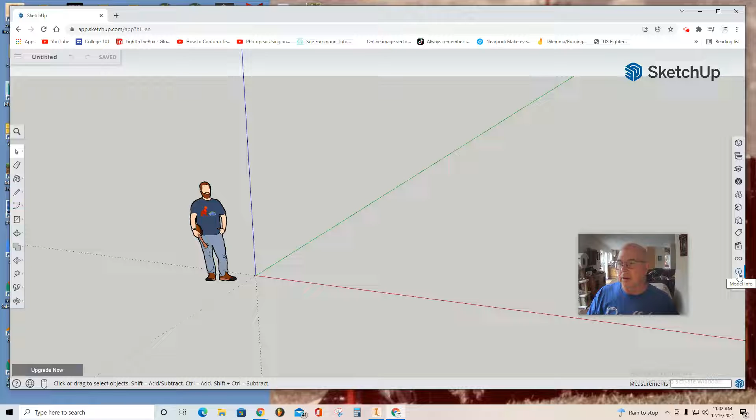Create new, and move down to the right where you see this model info tab on the lower right. Select that and change your units format to decimal. I've been changing the snap interval to 0.0001. Hit the enter key to lock it in.

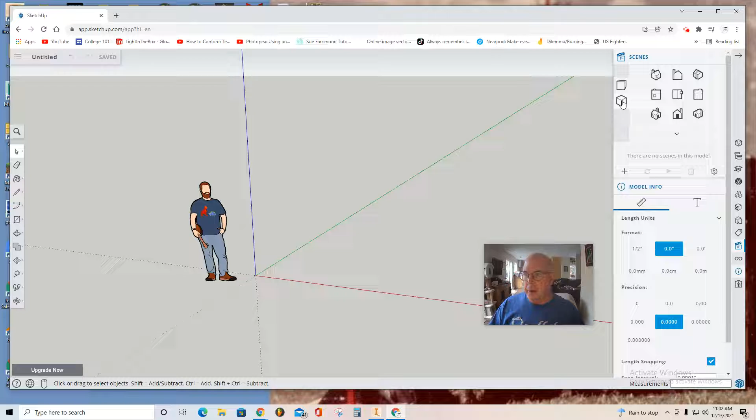And then move up two tools to the Scenes tab, which looks like a movie clipboard. Select it, put it in parallel projection and front view. I just like to select the 6'3" sir and delete him. Now I move my origin with the pan tool. See down the left, there's the lower left pan tool. Select it, move your origin down to the left, and then start with a very large rectangle at the origin.

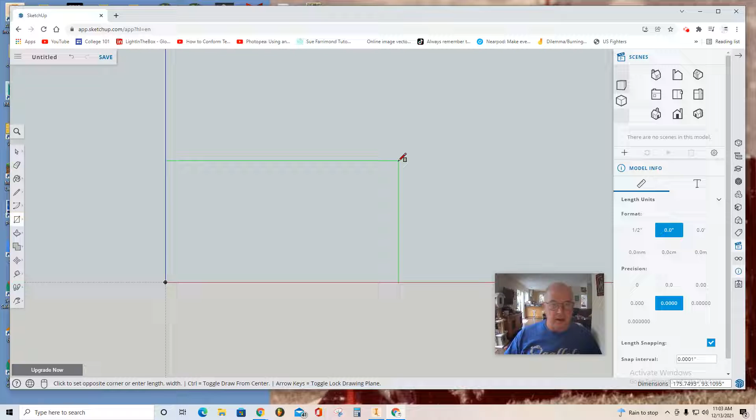Select the origin, move it up and to the right, and then take your hands off the mouse and type in 200, 216. That's a 200 by 216 inch movie set. Now, what I'm going to do is orbit using this orbit tool, and I'm going to use the push tool to push the front of my box back 200 inches. So I type distance down the bottom right. You see 200. I typed it in and then hit enter.

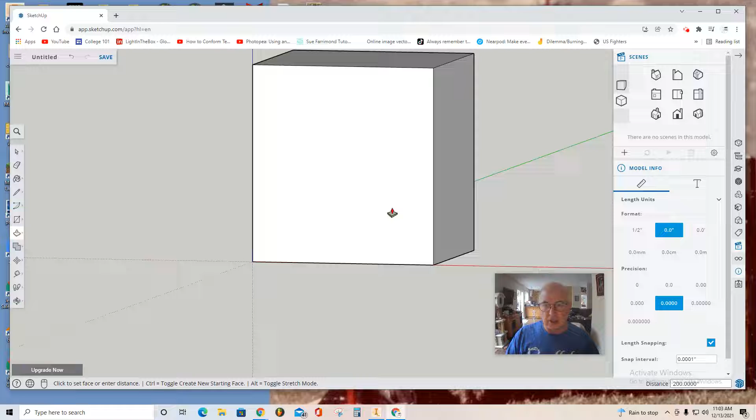Now I'm going to select the face again and push it back, and then take my hands off the mouse, and under distance in the bottom right, you're going to type 194, enter, and now you have a 6-inch wall. Again, put it in the front view and make sure it's panned and centered in the middle. Now I'm going to use what's called the offset tool. It's under the push-pull tool. It's the third tool down.

So I select the offset tool, select in the middle of my profile here, and then stretch. And down the bottom right, you see distance, approximately 8. So I want to hit 6, enter, and immediately use the line tool at the top and upper left. So I select here at the end point corner of this offset and push a line up to the top.

Escape button. Sorry. Now I'm going to use the line tool down the bottom right, where I select the endpoint here and move it across. And then again, hit escape on your keypad. Now you see I can use the eraser tool to erase this line and this line segment, leaving me with an L that is 6 inches offset.

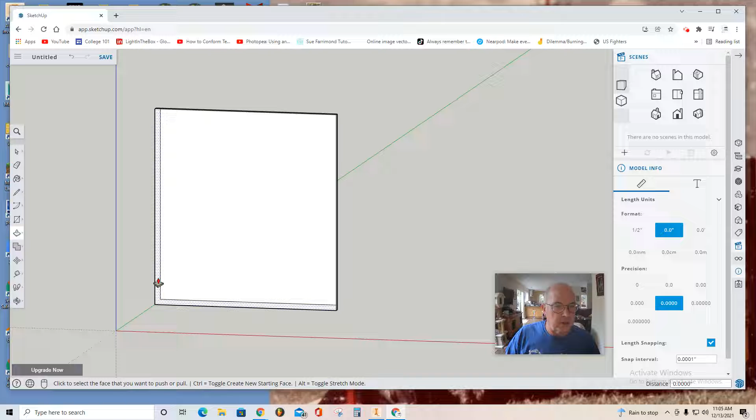Now I'm going to orbit a bit and use the push-pull tool. Make sure you only pull this L shape and then pull it out. And as you're pulling, you want to type 194. Enter. And that will give you, so far, a 200 by 216 by 200 set of walls and floor. The walls and the floors all should be 6 inches in thickness.

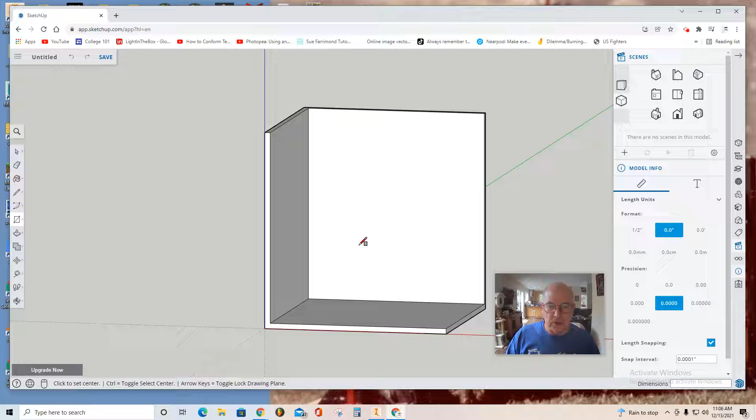Orbit this to draw. So start here at the edge where the floor and the back wall meet. Select that edge, drag your, oops, again, make sure you're in the right tool. Drag your door up. Type 32, 80. That's a standard good door. Hit enter, and there's your door. And then use the push-pull tool to pull it out 1 inch. So your dimension will be 32 by 80 by 1.

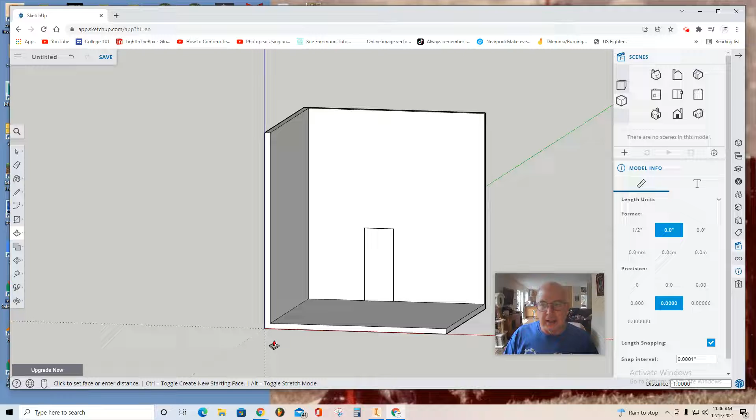Now I'm going to flip it to the right view. That's the house with the chimney on the side. I'm looking at the side of my room here, and I'm going to put a window right in here, not higher than the door, not too low, but just right. And that's going to be, again, 72, 36. Nice picture window. Hit enter. And again, hit

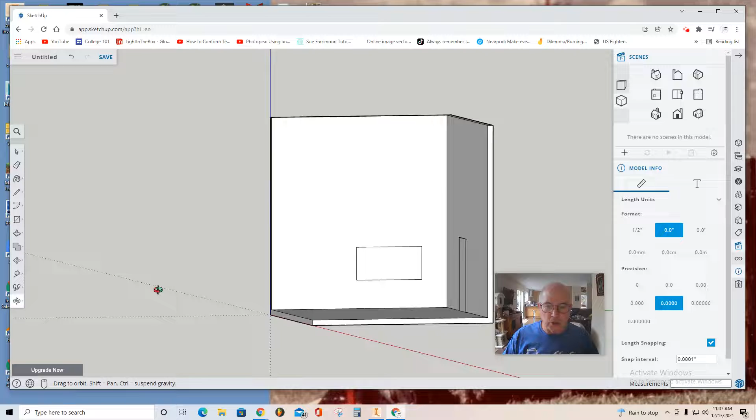escape. What you want to do is use the orbit tool and make sure your window is in a good position. I feel like it could be up just a bit. Put it in front side view again, and use the move tool here. There's a 4-arrow move tool. You can just put your move tool in the middle of the window and move it around so that you can get an aesthetic, nice location for your window. That's about the right place.

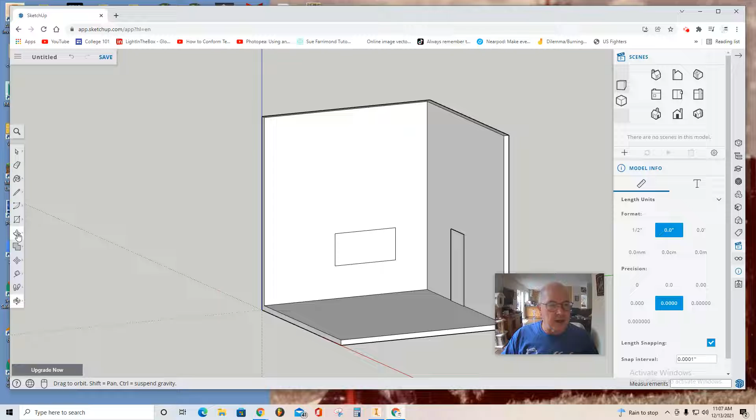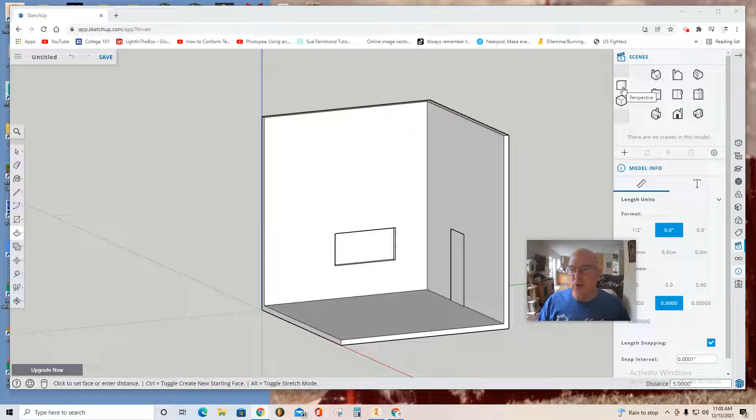And then I'm going to use the push tool, push it, but only enter the distance of 5, enter. Neither the door nor the window should be pushed through the wall. At this point, your movie set is finished and it's in parallel view. Don't forget this step. Put it in perspective view. And then you're going to orbit it and pan it into an aesthetic position, possibly save.

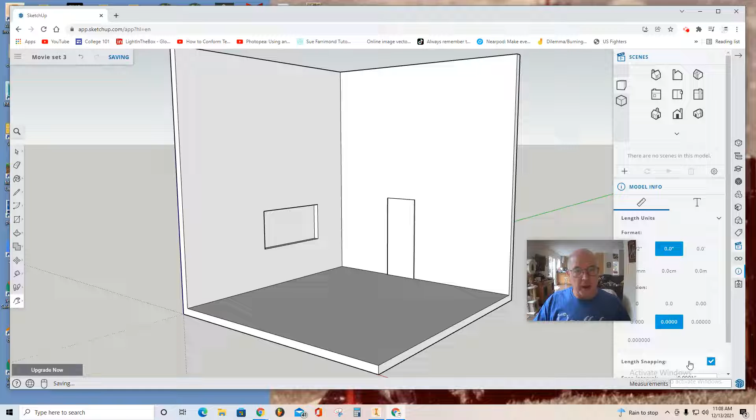So remember, double click the Untitled box and then call it movie set. I'll call my movie set 3 because I've already made a few, and save. Now that you have your movie set saved, you do want to zoom in a bit and pan. I'd like to see a view something like this.

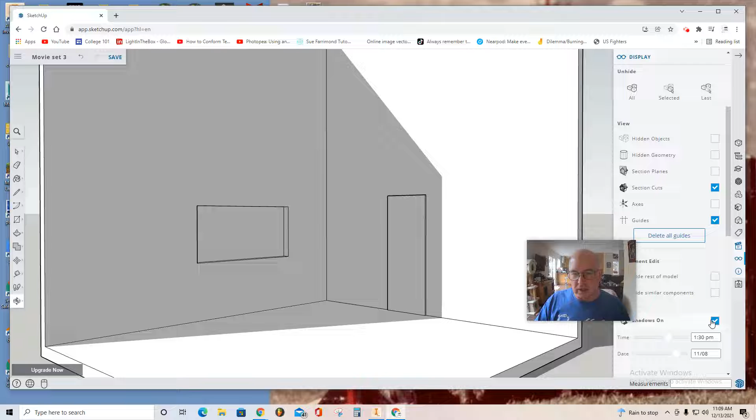I feel you could turn shadows on. So go to the display tab on the right. It looks like glasses. You want to turn axes off, shadows on, manipulate the shadows slightly like so. And then up here in the upper left, you'll see 3 lines. You want to select those, download as PNG.

And then down the bottom right, you'll see the export as PNG button. So you can export as PNG. And here down the bottom left, you're going to see movie set PNG. At that point, it's in your recents folder, and that's the image you're going to want to turn in for assignment credit. I hope this video helps.